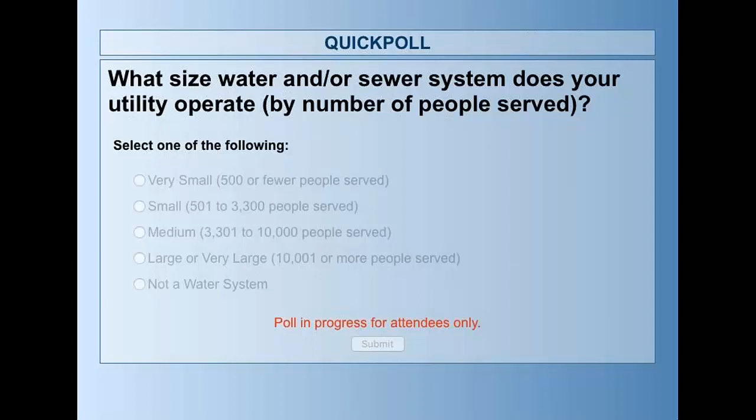All right, great. So it looks like we have quite a few people from small systems. That's great to see. 23% are serving 501 to 3,300 people. 17% are very small, less than 500 people served. A fair amount of medium and just a couple of very large systems. And then again, we're seeing that a couple of you are not from water systems, 25%.

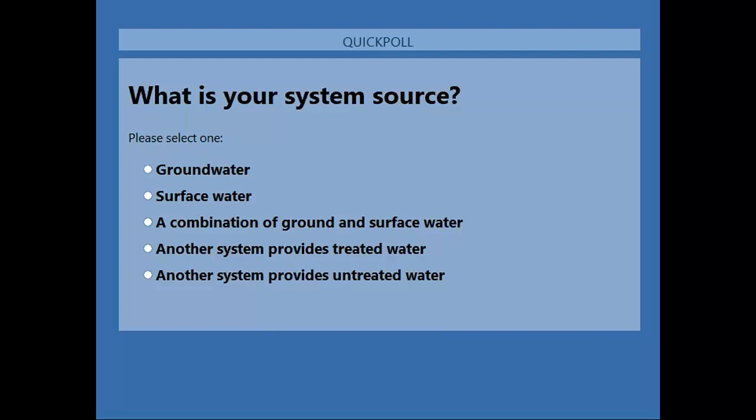Okay, it looks like we are still waiting for a few more people to vote here. All right, looks like we have just about everybody. So I'm going to close this poll and share the results. Wow, so overwhelmingly we have a lot of groundwater sources. Also 19% is a combination of ground and surface water, and then 14% is just surface water. And then in the minority, we have another system providing treated water and another system providing untreated water.

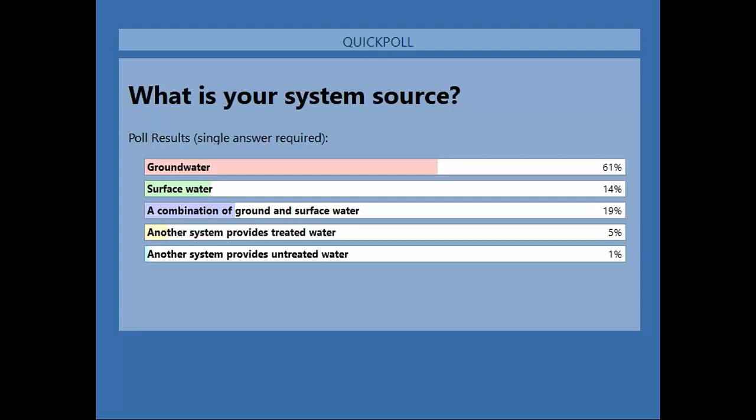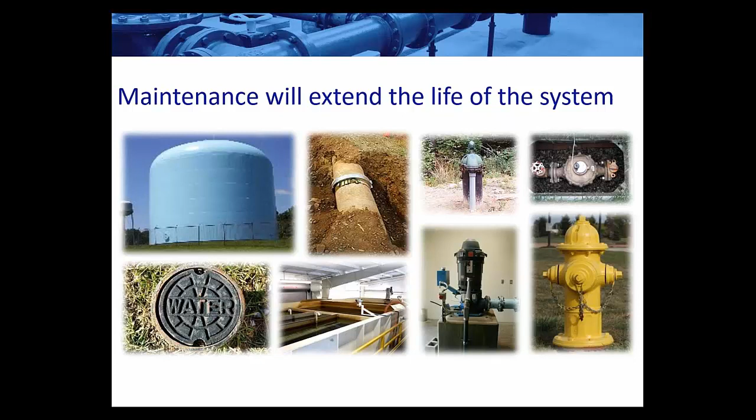So why is O&M valuable? Well, if an airplane was maintained the way that you maintain your water utility, would you fly in it? Typically when I ask this question, I get a pretty good chuckle from the crowd, and then a lot of head shaking. Nope, wouldn't fly on that plane. Well, why wouldn't you fly on a plane that was maintained the way you maintain your system?

Well, typically we know that we aren't doing the maintenance that we would like to be doing. Well, why not? Money. Money is limited. But isn't drinking water safety important? Of course it is. So what if we can show value to doing maintenance over time instead of cutting that maintenance budget and putting things off?

So this shows how an asset might perform over time. Typically the asset's going to perform at an acceptable level for a fair amount of time with the condition slowly changing, and then at some point that asset condition begins to change more rapidly. When you get to that point of reaching the minimum acceptable level of service, you have to make a decision about what to do, about to repair it, replace it, or rehabilitate it. If you don't, and you continue to let that asset run, it will ultimately run to failure. What if instead you had the chance to intervene at some point before the asset hits that minimum acceptable service level? Then you can change that curve and you can improve the condition of that asset again.

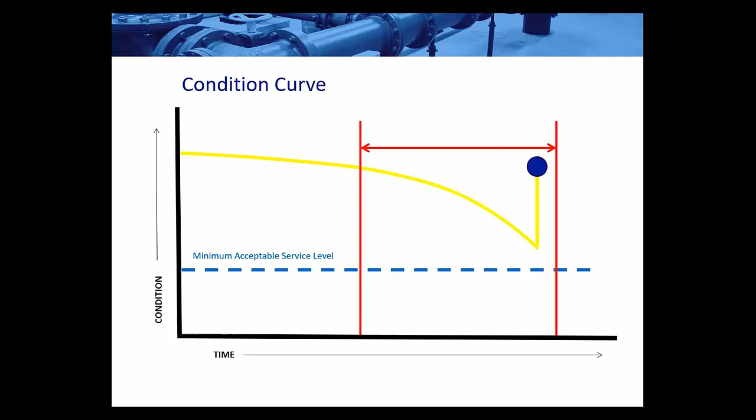This will extend the asset's useful life in a manner that is planned, and it potentially allows for further intervention down the line.

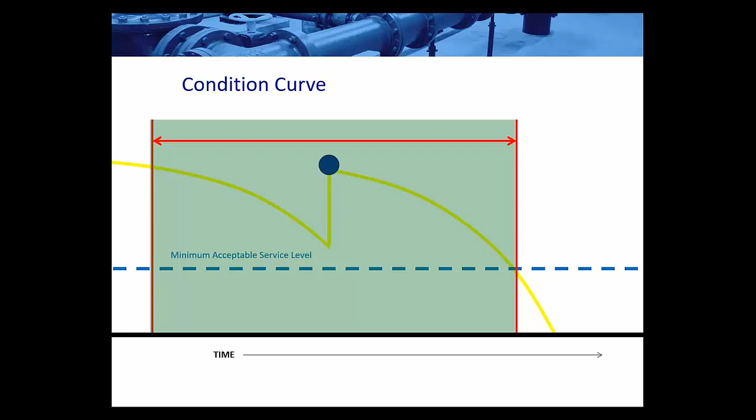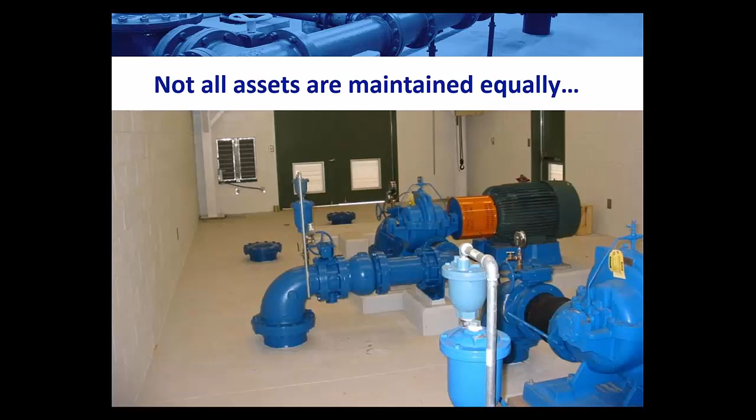You may not want to do this for every asset in your system. You may not want to do maintenance to everything. You may want to let some assets run to failure. But the assets that are in your system that are critical, that have a high dollar value, you definitely want to have planned maintenance and possibly planned rehabilitation for those assets to extend their life and to get the maximum value out of those assets.

So what we've been talking about are two basic modes of maintenance. First, we have the proactive, and then we have the reactive. And of course, we're often working in this reactive mode of fixing it only after it breaks. We tend to operate this way often and repair or replace only after the asset breaks.

So if we go back to that plane metaphor, airlines aren't allowed to operate this way, or we would see airplanes falling out of the sky. So when you think about it, water utilities really are the guardians of public health. They're what makes our modern civilization possible, what makes industry possible, what makes population growth possible, all of those things. Because we don't have to deal with the issues of waterborne diseases like we used to.

So it is really important to think about the role that your utility plays in your society, and if continuing to operate in this reactive mode really is the right option, or if indeed we should be doing this proactive, where we work in doing maintenance to keep those assets from breaking.

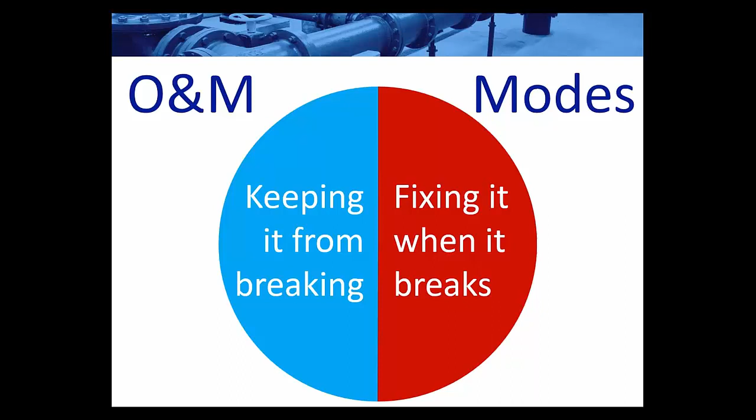So that's what we're really here to talk about today, is focusing on this proactive maintenance, because reactive maintenance is almost always more expensive than proactive work. It can be very inefficient. It can be very unplanned. It puts you behind that 8 ball. It can be more complex. It can require overtime. You might not have the spare parts on hand that you need. So getting the thing fixed in a timely fashion can be problematic.

So we want to be more proactive than reactive. So when we focus on this proactive side of things, there are 3 different types of typical proactive maintenance. We have routine maintenance, we have preventive maintenance, and we have predictive maintenance. And if you add all of those together, you're definitely going to get savings at your utility.

So why would you want to ensure that you're doing these things? Well, according to a case study by the Office of Energy Efficiency and Renewable Energy, practicing periodic component replacement in the form of preventive maintenance saves an estimated 12 to 18% over reactive maintenance.

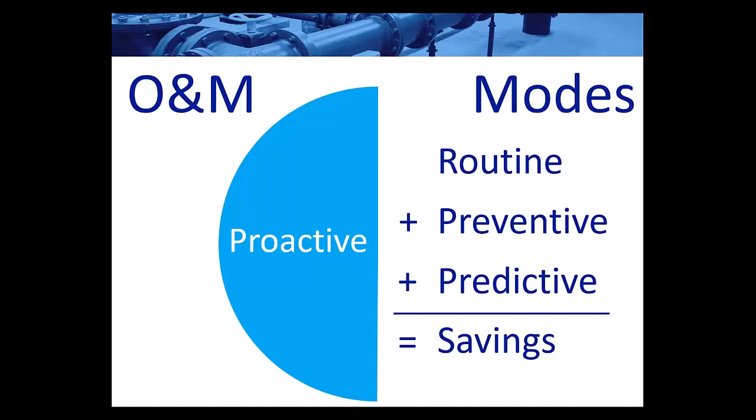That number could be fairly conservative for water utilities where a lot of our assets are buried, so getting to them to work on them can be more difficult than walking into a building and working on an asset. Today we're going to focus primarily on routine and preventative maintenance, with the tool we're demonstrating, and how they can help you with O&M planning and scheduling.

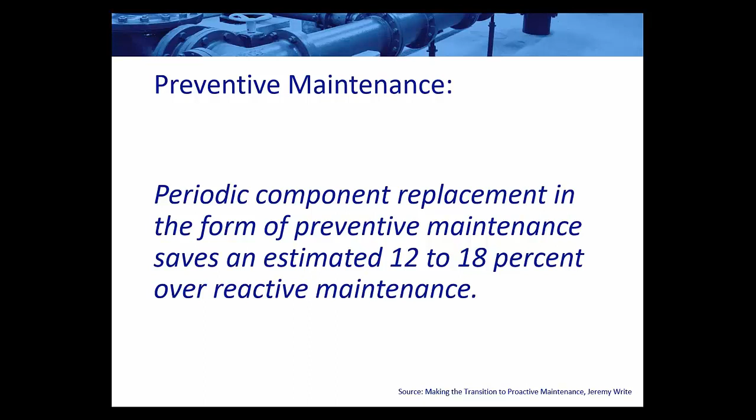When we look at preventative maintenance, it's not a new concept. It is standard practice across almost all industries, especially if you rely on machinery to create a product. It's definitely a core component of lean manufacturing. According to a case study by the Office of Energy Efficiency, there's 12 to 18% savings by doing the maintenance. So you want to make sure you're making this transition to preventative maintenance.

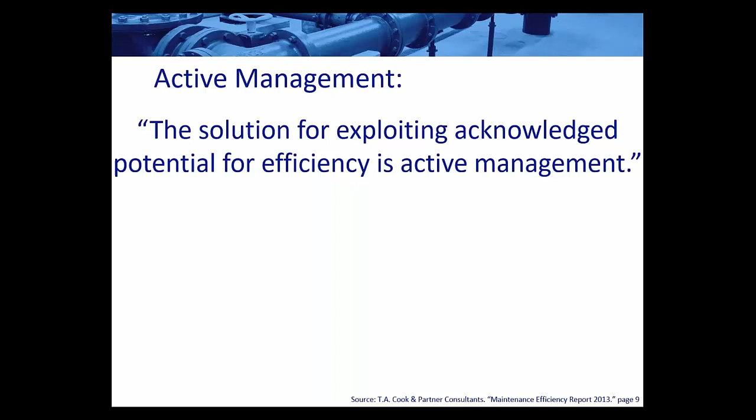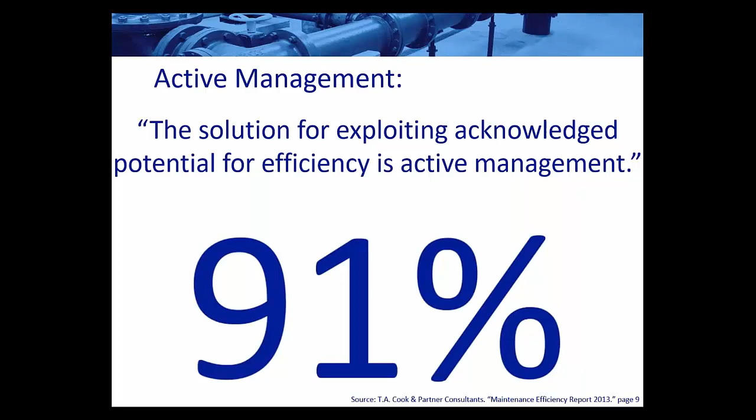Another study showed that whenever people were surveyed about maintenance and asked if it's important to be doing maintenance, overwhelmingly 91% of respondents agreed that active management is an important variable when it comes to efficient operation. So it's not that we don't know we should be doing maintenance, it's that we struggle with proving value. These statistics show that there is definitely cost savings in doing maintenance.

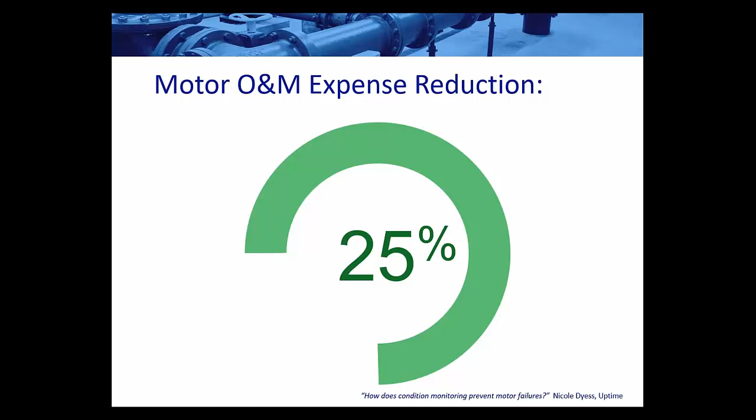And if you add that third type of maintenance, predictive maintenance, the savings can further increase. Condition monitoring can decrease your motor operations and maintenance expenses by up to 25%. So it's definitely a valuable effort to start with some preventative maintenance and work your way into some predictive maintenance.

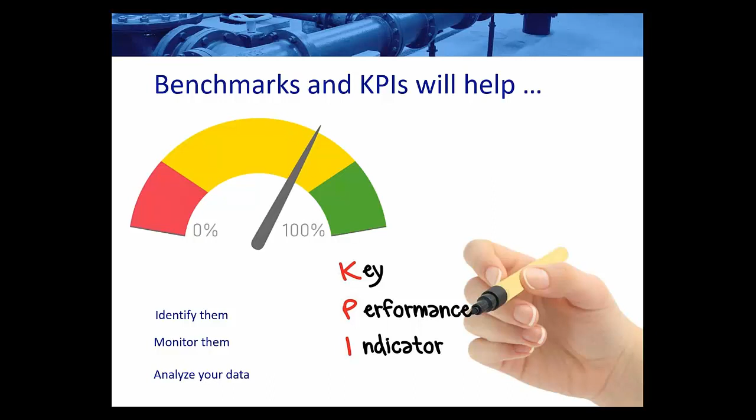We want to make sure we are looking at our benchmarks and key performance indicators, and that we remember, in asset management terminology, we're thinking about level of service. You want to be able to identify those key performance indicators, benchmark them, monitor them, and then analyze that data. But to be able to do any of that, you have to have one thing, and that one thing is data. You need data, and the best way to start getting that data is by implementing a preventive maintenance program so that you can start tracking information about your system.

So just a couple of thoughts: if you don't manage your assets, they will manage you. And for the majority of our utilities that we polled this morning, you're being managed by your assets. That's really a difficult work environment to be in day in and day out. You're constantly waiting for the next thing to break instead of planning your day in advance and knowing what you're working on.

Another quote that sums it up nicely is that even if you pride yourself on how quickly you can make repairs, and you're reactively repairing things that could have been dealt with through proactive maintenance, you're basically rewarding failure. So if you think about it — yeah, it doesn't take us long, we're really good at getting out there and getting it fixed — is that really acceptable? Because you're letting it break, you're letting something fail before you pay any attention to it. Just another way to think about how we go about our business.

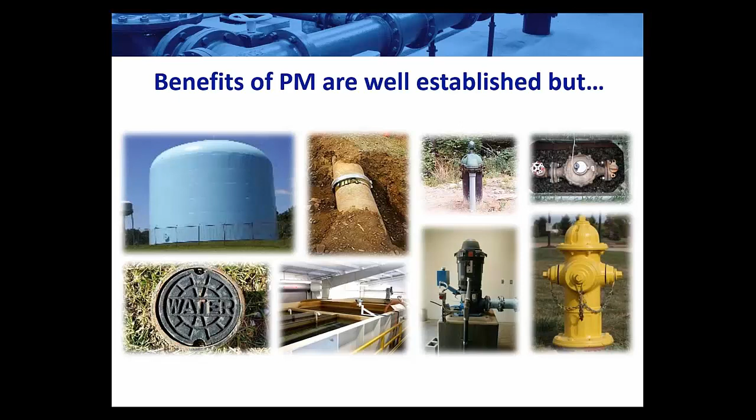So we know that maintenance is beneficial and cost effective, but this probably leads you to a couple more questions: what should I do, and when should I do it? These can be pretty difficult questions to answer if you don't already have an established plan, a good guidance document, or if the person who used to maintain the system is retiring or has already retired and all of that maintenance information left with him or her. So what we want to talk to you about today is a way to address those questions. James is going to show you a tool to help you get started. So if you'll bear with us for just a second, James is going to take over.

The good news is you do not have to remake the wheel if you're just getting started with this. Some of you may be familiar with the EPA's black box card file. This was essentially a low-tech recipe box list of daily, weekly, monthly, annual tasks, developed back in 2004. There are actually two versions — one is tribal system specific, but they're essentially the same. The idea was to lay out the typical tasks a small groundwater system would do and give them a place to record that information. The tool we're talking about today is sort of the next iteration of that card file, which is an electronic version of this.

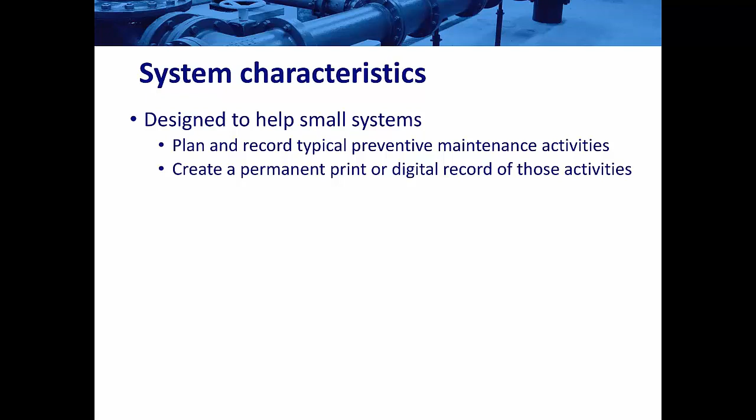This is designed to help small systems plan and record typical preventive maintenance activities and to create a permanent print or digital record of these. It looked like about half of the systems sitting in today don't have anything yet, so this is a good starting point.

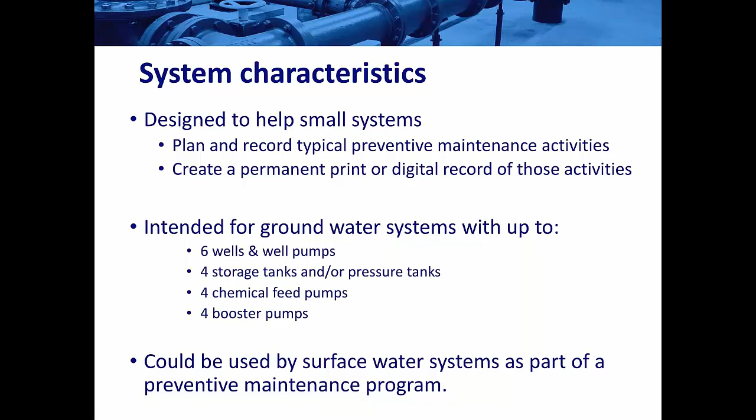The documents themselves are designed for small groundwater systems with up to 6 wells and well pumps, 4 storage tanks or pressure tanks, 4 chemical feed pumps, 4 booster pumps, and there are a few other criteria. But it could also be used by a surface water system as part of a preventive maintenance program.

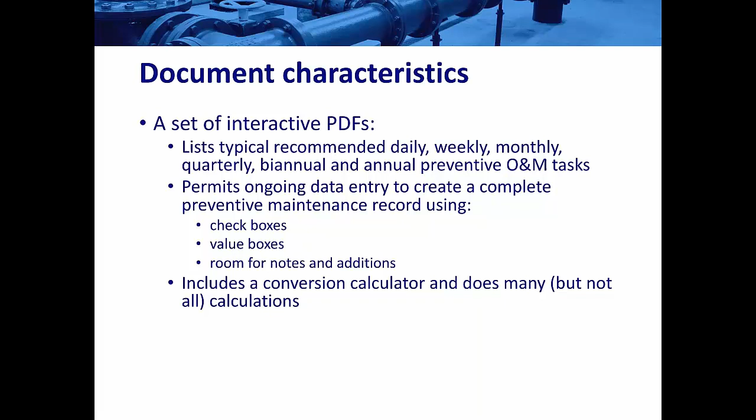The document characteristics: it's a set of interactive PDFs. They list the typical recommended daily, weekly, monthly, quarterly, biannual, and annual preventative O&M tasks, and they permit ongoing data entry. They use a combination of checkboxes where you can check off that a task has been done and initial it, value boxes, and rooms for notes and additions of tasks not listed. It includes a simple conversion calculator, and it does some but not all of the calculations, which you'll see as we demonstrate this further on.

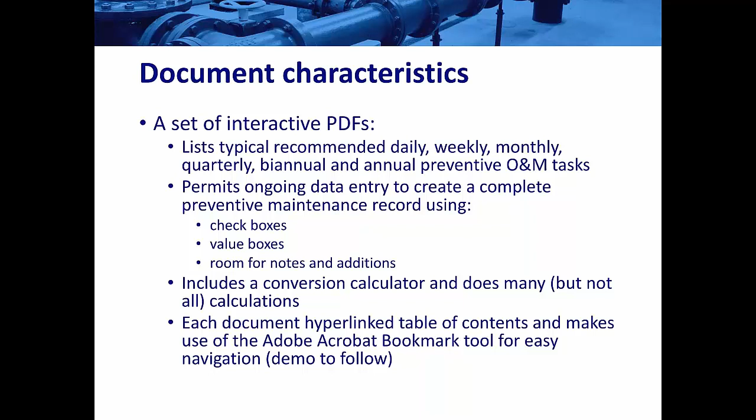Each of the documents has a hyperlinked table of contents and makes extensive use of Adobe Acrobat's bookmark tool, which I'll be demonstrating shortly. That makes it really easy to navigate in and around the document if you are using it in its electronic format.

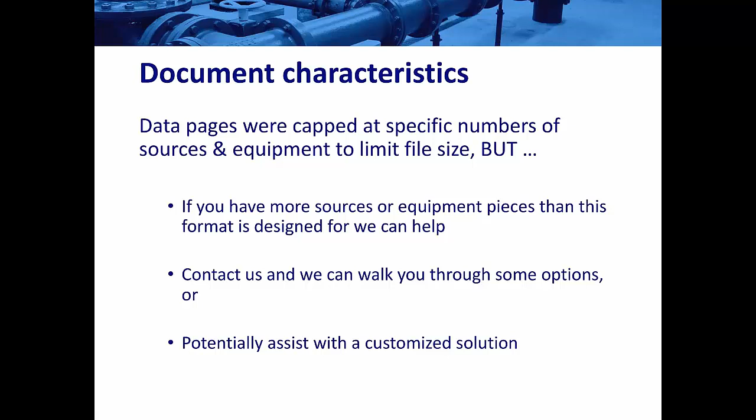Now, I gave you some system characteristics earlier. The pages were capped at specific numbers to limit the file size, but if you have more sources or equipment pieces than this format is designed for, we can potentially help. You'll see our contact information at the end. We can walk you through some options and potentially assist you with creating a customized solution for your system.

Basic software requirements: it's a PDF. All you need is the free Adobe Acrobat Reader, which you can download from a lot of different places—just search for Acrobat Reader. Do not use another PDF reading system. I'm, for example, sitting on a Mac. It has Apple Preview—if I use that, I can open up the pages and look at them, but the formatting is off, and some of the formulas will not work.

So it's designed for Acrobat. Acrobat is free, and if you want to use this, we highly recommend you use Acrobat for that. Now, it is an interactive document, and it is editable. But to do that, you would need the full version of Adobe Acrobat software, and I'd suggest you not try that unless you have a lot of experience with editing complicated PDF files. If you do have that experience, feel free to go for it, or contact us and we can give you some help.

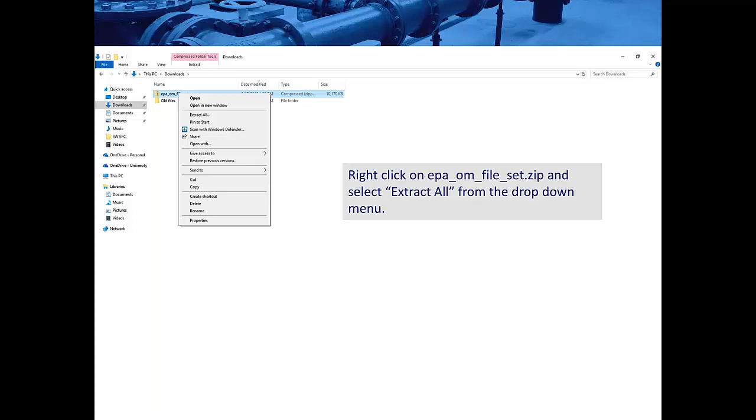You will have to unpack that, and Windows 10 has a standard unpacking software built into it. There are other free versions of zip software you can use. So if you go there, click on your file set, right click and hit extract all, which is right there.

It will pop out an extracted version of this file set, also called EPA OM file set, and nested in that is the actual file set folder, which is the exact same name, just in capital letters. If you look in there, you'll see essentially a duplicate of what we saw on the individual page download page.

It's got the individual monthly files. It's got a set of guidebooks, introductions, and some ongoing logs, and a README file, which contains a very short synopsis of what we're covering today and has some of the basics in there. I suggest you take a look at it before you start working with the other files.

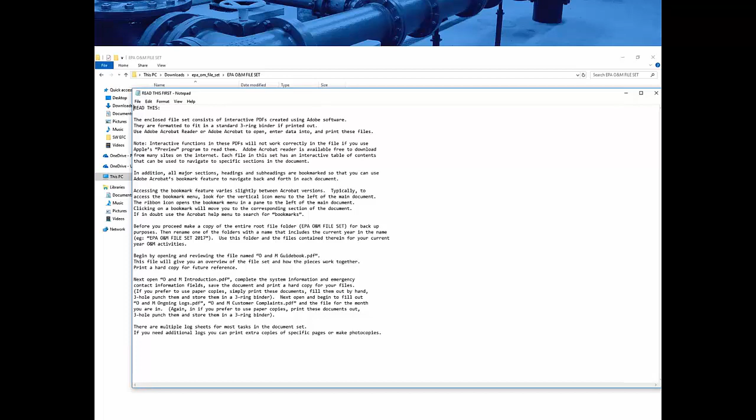As far as actually working with the file set, I highly recommend you, first thing you do, make a copy of it and append the year to it. That way you will have a working copy that you can use as a basis for upcoming years, and you have a file set that you can work on now. You can see I've done that here. I just appended 2018 to the end of it.

I kind of went a little overboard in my sample here and actually appended the year to the individual files. You might want to do that if you think you may be passing files around between people, particularly if you use this for a couple of years. You will want to be able to distinguish November 2017 from 2018 or 19.

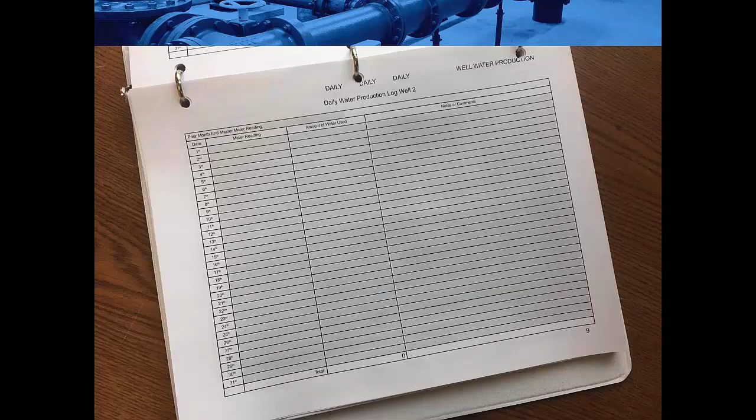There are also a set of ongoing logs here. Basically, you can open these up. And again, as I said, you don't actually have to use them in their digital format. You can use them in their analog format as well. It works just as well.

These are formatted for 8.5 by 11 pages, but if you want to get the full benefit out of this, you really need to use the Adobe version of it. I'm sure most of you are probably familiar with Adobe, but I want to point out a couple of things just in case you don't work with it very frequently.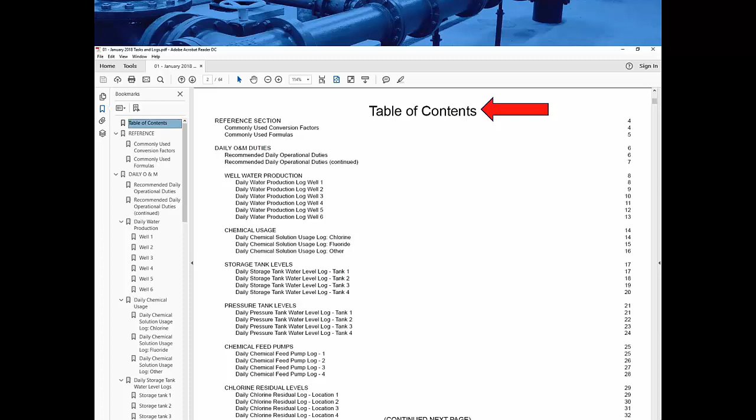And again, you can use this little button here to close the menu down if you don't need it right away, or you can use this X up here to close the entire thing. So they mirror each other.

So we're going to do a quick little document demo here. I'm just going to show you some of these, so bear with me while I switch screens. I've got some of these files up, and I'm just going to give you a few highlights.

Okay, Acrobat Reader. So the first file to look at is the introduction. This is a live version, so you'll see me navigating around here. It's basically got a place to put system information, contact information, and some references.

Important pieces to know: system information. This is where you would fill in your water system name, and so on. Go ahead and save often.

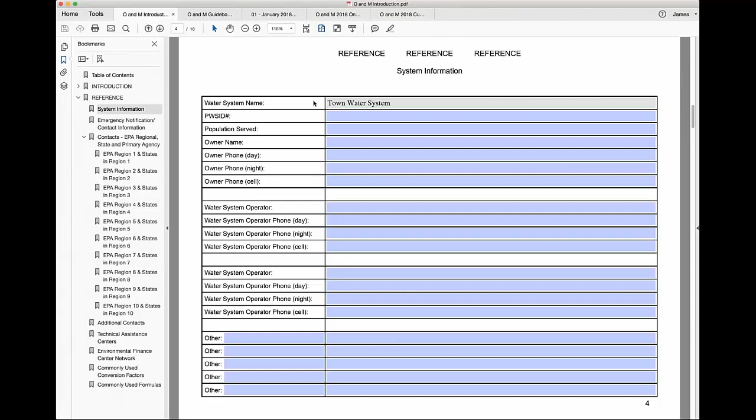The next tab is also very important: emergency contact information. I've put some information in here, but you want to have all these numbers listed ahead of time so that you're not looking around for the fire department or the hospital after an incident has taken place.

This also contains a lot of useful contact information. There's EPA, regional, state, and primary agency contact information. There's information for the various technical assistance centers around the country and all of the members of the EFC network.

I've also included the simple calculator, so you can see this is essentially an interactive calculator. If you type information into the blue box, you'll get the corresponding conversion in the right-hand column. It also has a list of commonly used formulas at the end.

The next document I want to show you is the guidebook. This is basically the book that lists all of the tasks that are in the various monthly components and tells you why you're doing them. It also gives some basic information on how the files can be used, and has guidance notes.

These are very useful, and then it has specific guidance notes for the specific tasks. This is obviously something you would only have to make one copy of or print out once, but it's a useful thing to have to refer back to if you're looking at the monthly file tasks and you're not entirely sure what to do or why you're doing one of the specific tasks.

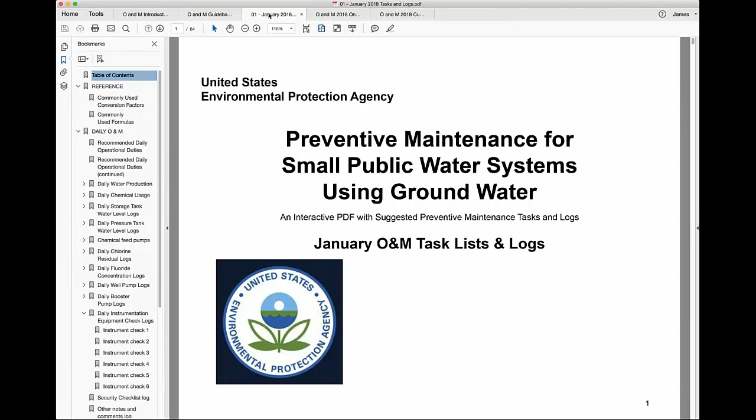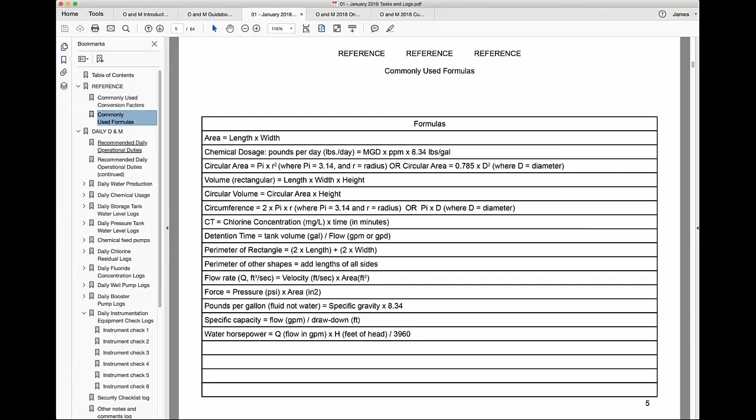Again, we've got a bookmarked table of contents. We've added those conversion factors and commonly used formulas to the beginning of this. This is really set up to list daily activities, and then it moves on to weekly and monthly activities. So the first thing here is essentially a list of recommended duties.

This is essentially a checklist you can use to just verify that you have all of the tasks that you want to have accomplished listed. So in this example, I've unchecked the fluoride concentration because maybe fluoride isn't an issue with the particular system that I'm looking at.

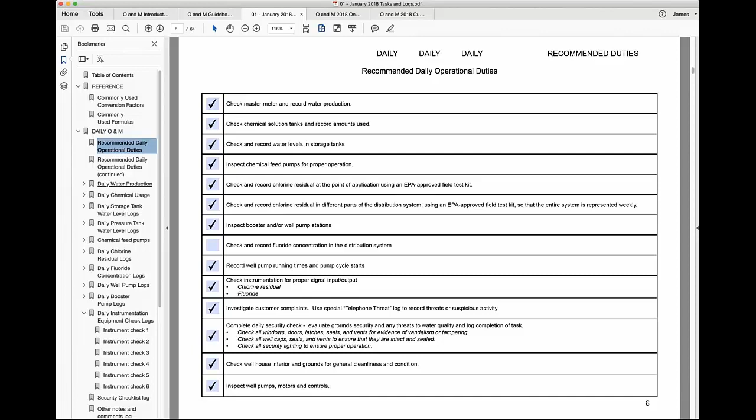We've got individual logs for a lot of different tasks. So this, for example, is one of the well logs. There are actually 6 of them. If you only have 1 or 2 wells, you obviously don't have to use the other ones, but you can use these links here to navigate back and forth between the different wells.

What this will do and what it won't do: I've got a prior monthly meter reading listed up there, and individual meter readings listed here. It will not calculate the amount of water used on a daily basis, but what it does do is keep track of a running total down at the bottom.

The reason we did it this way is that a lot of systems just don't actually log their production on a daily basis, and it made the math and programming a little more difficult than it needed to be. So as a compromise, we let you do the sort of daily math, and it will keep track of the running math. There's also a place here for you to put notes if you want to.

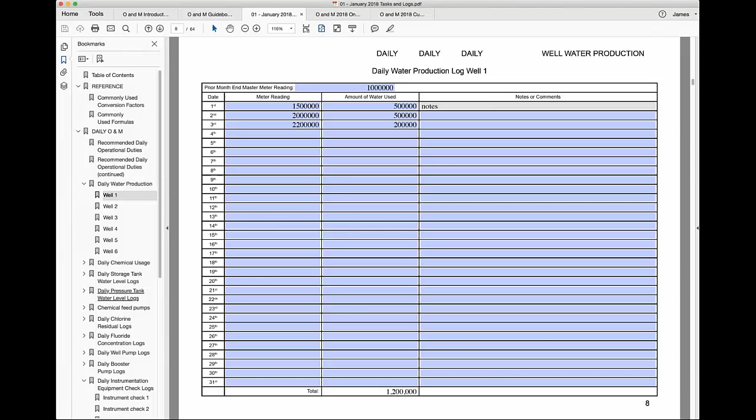So I'm going to move on, and skip some of these and show you some others. For example, daily storage tank levels: you've got a place to put what your normal operating high and low levels are, places to record system pressure or water level, and actions taken that are necessary or not.

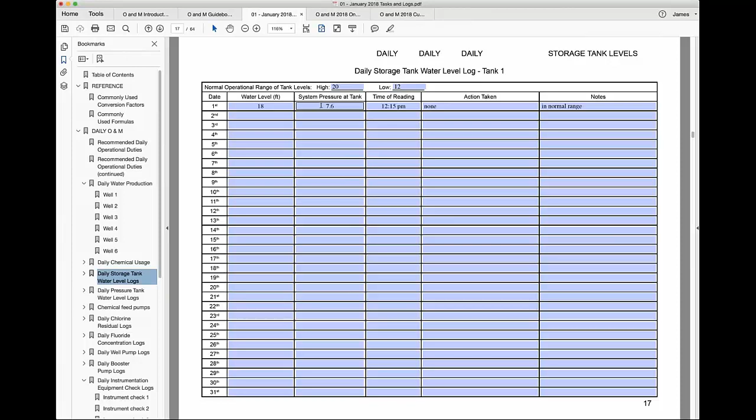It's some basic simple math. Over here you can put in what your expected dosage is, and use that as a way of comparing things.

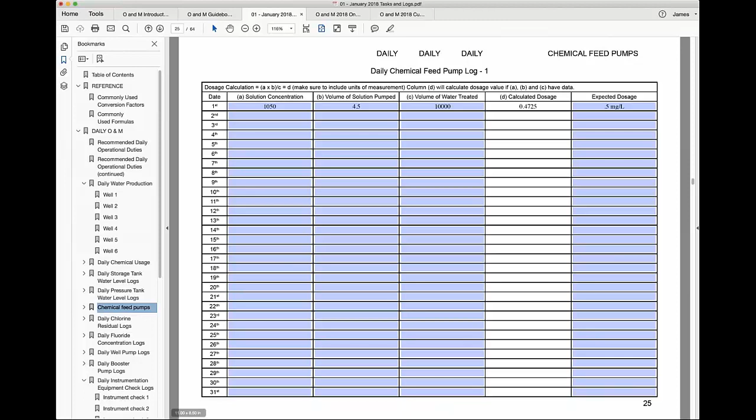There's also room for you to add additional tasks, if there are additional things that you and your particular system would like to have checked on a weekly basis. And so you can add those in, save the document, and they'll be there for you for future use.

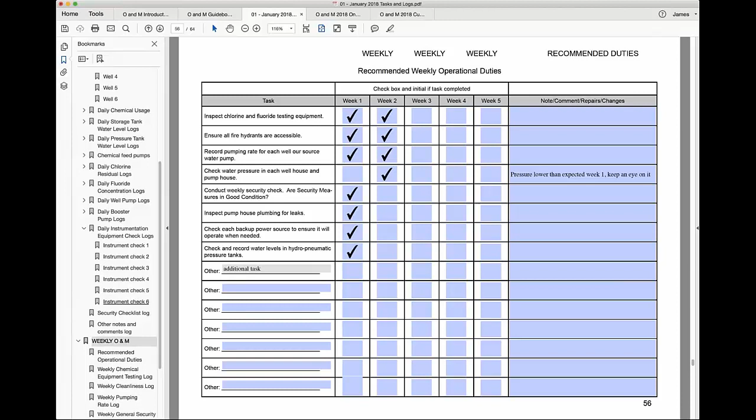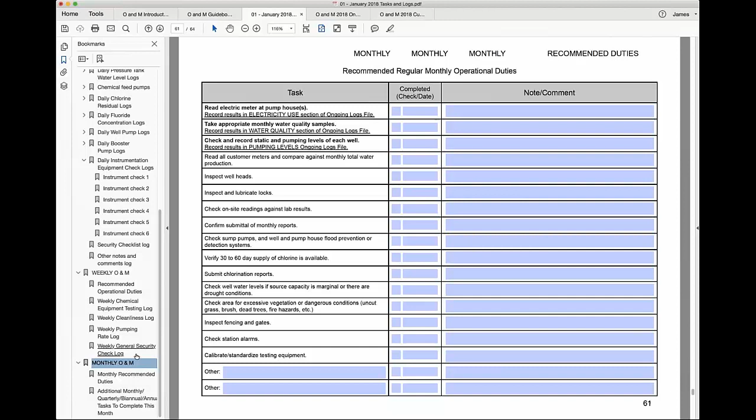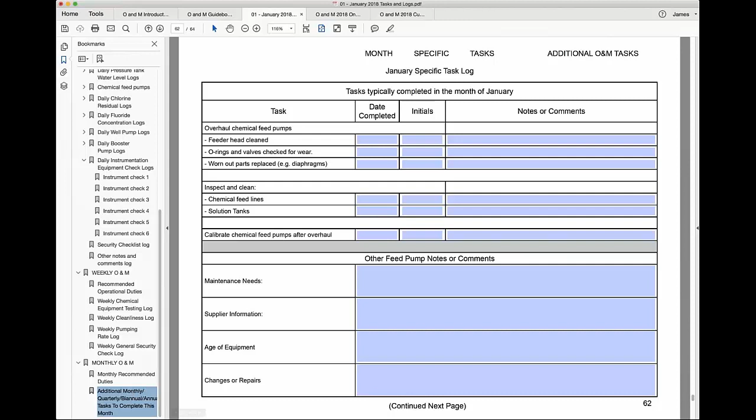Each of the monthly files is broken up to have sort of the typical recommended monthly duties and then additional duties that are typically done in that month. So for example, the January monthly specific tasks has overhauling your chemical feed pumps listed in it as an extra task, inspecting storage tanks for sanitary deficiencies, making sure fire hydrants are accessible. And obviously we've left a lot of space here for you to move additional tasks around.

Different tasks may occur at different times depending on where you are in the country and what your weather is like. But basically the idea here is that all of those monthly, quarterly, biannual, and annual tasks have been folded into this monthly O&M section so that you do them in the appropriate month, and many of them have additional reminders in ongoing months. So for example, getting your system ready for winter. The first notice, I believe, shows up in October or September, and then in following months there's an additional reminder to verify that you actually did those tasks. So that's sort of the basic layout and the format of the monthly files.

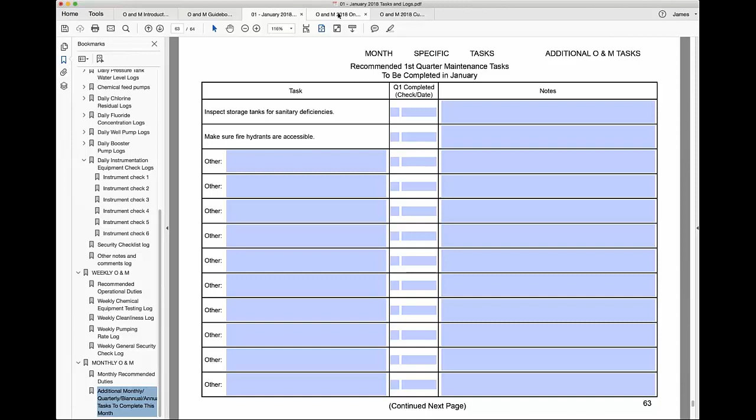Now I'm going to move on to the ongoing logs, and as Don was talking about, sort of having data to do analysis, these will help you. This has your water quality, your electricity use, well pumping levels, repair logs, valve exercising, and customer service and training logs all kind of folded into one location. So for water quality sampling, it's very simple. It's just, did you take your samples? Put some notes in the end. We've provided space for 6 different sampling locations.

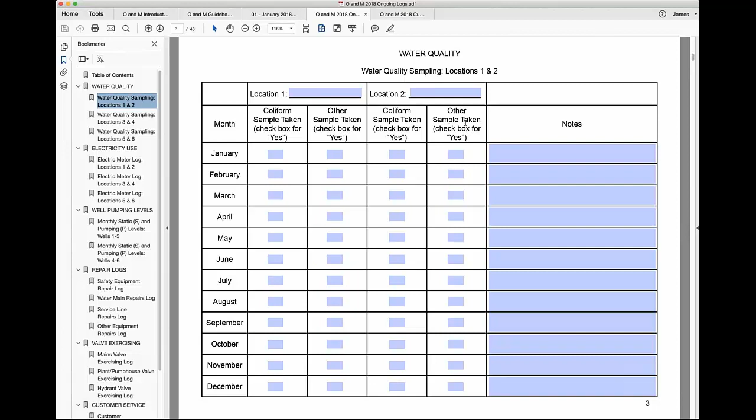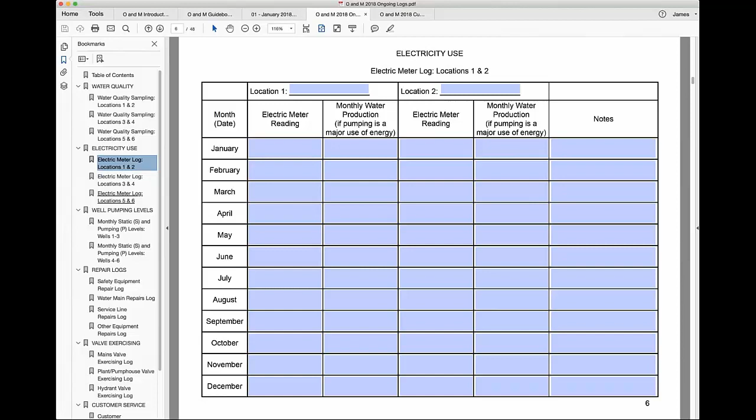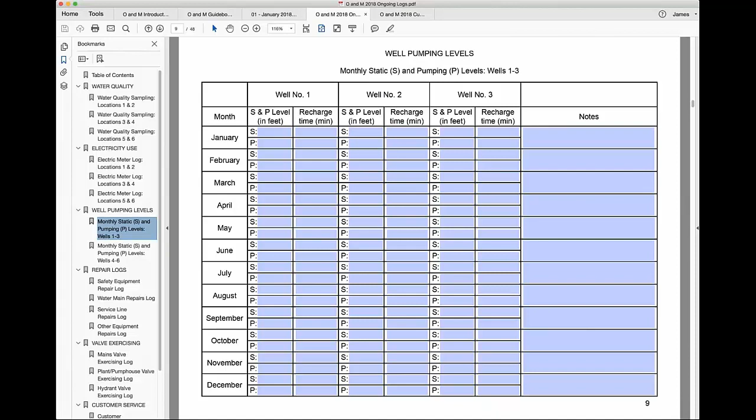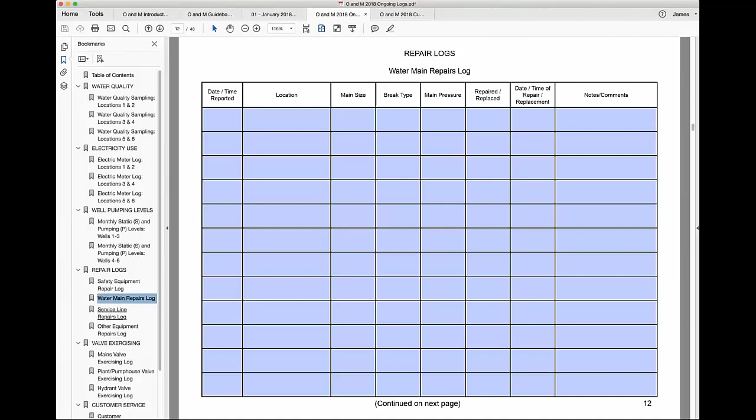Basic repair logs. Safety equipment should always be in perfect working order. The best way to verify that is to check it frequently and log your repairs. That way, if there's a chlorine leak and somebody's got to take the SCBA in there, you'll know that it's functioning. We've also put in place logs for water main repairs and service line repairs, and other types of equipment repairs. I can't emphasize enough how important it is to log water main and service line repairs.

One of the harder things for a water system to do is to get a good idea of the condition of its pipes, because they're underground and we often can't see them. Past performance is one of the best indicators of future performance, particularly when it comes to pipe. If you log this kind of information and, more importantly, take this information and visualize it, i.e. put it on a map, and that could be something as simple as push pins on a wall, you will start to notice patterns in your breaks, which will help you effectively maintain your system and build capital improvement plans and do that sort of thing.

Valve exercising is also a place I think that a lot of systems fall down on. It's one of those out of sight, out of mind things. You don't really need the valve to work until you have a break and you need to isolate a part of the system. And I've seen many, many systems that once they get to that position, go to try and turn a valve and it won't turn, and then they have to spend a bunch of time hunting, looking for the next valve to shut off that part of the system.

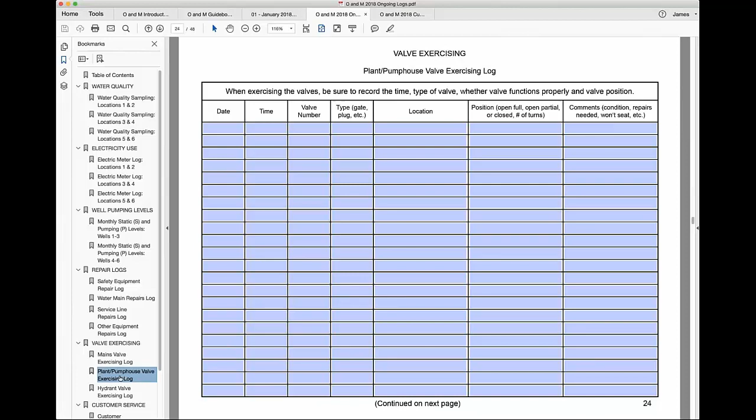We have put in logs here for mains exercising and for plant pump house valve exercising and for hydrant valve exercising, and scheduling for these is built into the monthly files. The idea is that for a small system, over the course of a year all of the valves would get exercised. You could obviously extend that framework to a multi-year period if you've got a larger system, but it's an important thing to do, and the only way to figure out whether they work is to actually exercise them, and obviously you want to log that and never start a valve exercising program on a Friday because there will be breaks.

And then finally, we've got a customer service log here. Dawn mentioned level of service at the very beginning. Knowing what your customers want, how you're reacting and responding to them, and being able to document that kind of information is very important. One of the best ways to do that is to talk to your customers. Your customers tend to call you when there are problems. You should note that. A lot of systems do a very, very good job of taking care of problems on the fly, but they do not do a very good job of documenting what they've done.

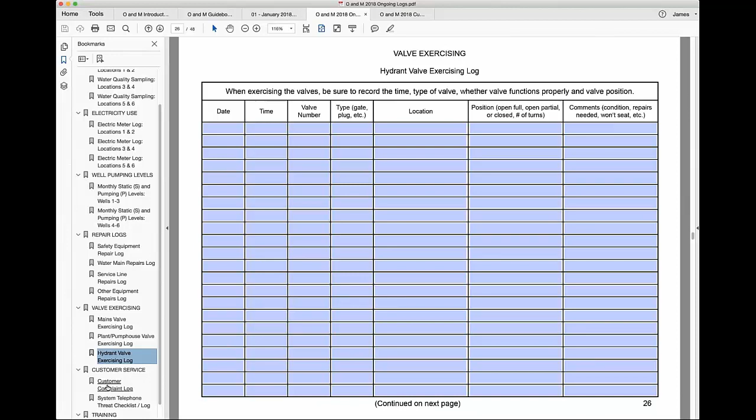And when you have a lot of customer service complaints about a particular issue, if you've documented both the fact that those complaints came in and how you dealt with them, or perhaps didn't because you didn't have the appropriate equipment or funding, having a log like this is very, very useful when you're going to your board members or to your ratepayers if you need to increase the rates for some reason.

And this is very, very simple. This is based off an Excel spreadsheet. It was essentially just a time reported, the type of issue, who it is, what kind of action you took, and importantly, when you resolved the issue. Those time lags can be very, very important, because if you've got a level of service that says we're going to repair all reported leaks within 24 hours, you want to be able to document whether you've actually done that or not, because if you have, that's something that you can brag about to your customers.

And then second to last, we've got a telephone threat list. Hopefully you will never have to use this, but occasionally people call and make threats to systems, and obviously in a situation like that, you want to have as much information about the call as you possibly can so that police or the appropriate authorities can potentially identify who it's from. An easy way to do that is to have a simple checklist like this, where whoever's getting the call, while they're listening to the person ranting and raving, can sort of check down the appropriate criteria about the caller's voice. In these days of caller ID, you might even actually be able to put their phone number down.

Last but not least is an employee training log. This is an industry that requires ongoing training. You want to be able to budget for it, and you want to make sure that your folks are doing their training on a scheduled basis, so you don't sort of run to the end of a time period and realize one of your operators has to take 2 days off to go for a training because they need their hours. This is a simple way of keeping track of whether that's been done.

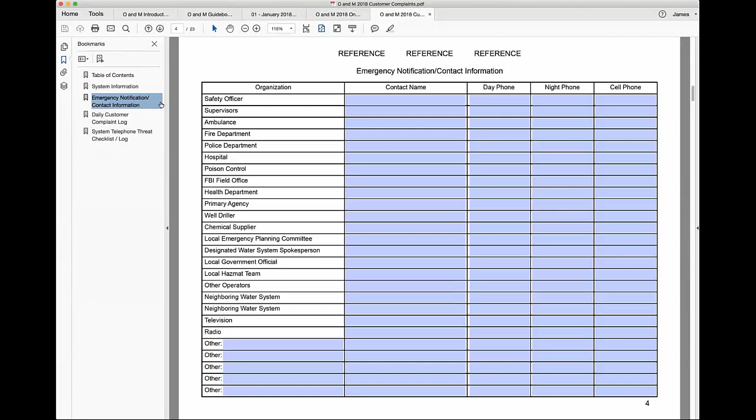The last document I'm going to show you here real quickly is the standalone customer complaint log. Sometimes the customer complaints and security threats come straight into an operator. Sometimes these happen when you're out walking down the street talking to people or doing some work on the system, but quite often calls like this come into the city's main desk or the utility's main desk. So we've essentially created a duplicate log that you could give to a front-end receptionist, or perhaps your billing department, or other people that are sort of customer facing, so that they would be able to take down this information. And it's basically got a duplicate page for the emergency information and your basic customer complaint and telephone threat checklist logs.

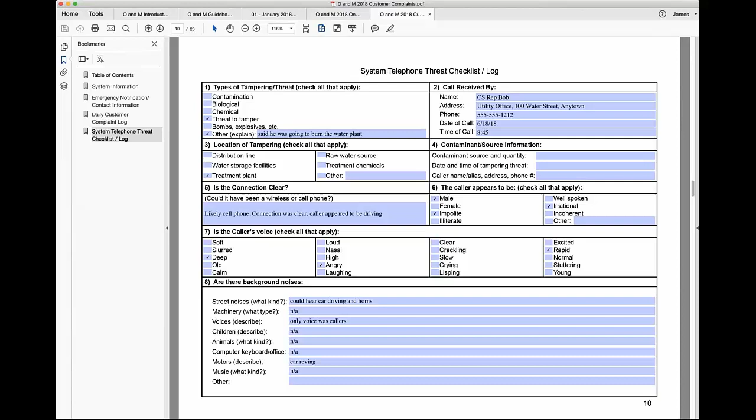So with that, that's sort of a brief overview of the document, and I realize that's very, very fast, but the guidebook is a very, very useful resource. It explains why all of the pieces are there and what they do. Now let me get back to my PowerPoint screen here and move forward.

Alrighty. Whoops, technical difficulties, 1 second. My PowerPoint just crashed on me. Dawn, would you mind picking up? Hold on. Never mind. Sorry about this, folks.

So we're going to go back to a couple of poll questions. Sorry about that. To sort of wrap things up, and then we will open up the floor for questions. Sorry that went a little bit longer than I expected, but we do have a few more minutes. Yeah, I can launch our poll here. I'm going to go ahead and launch this first poll.

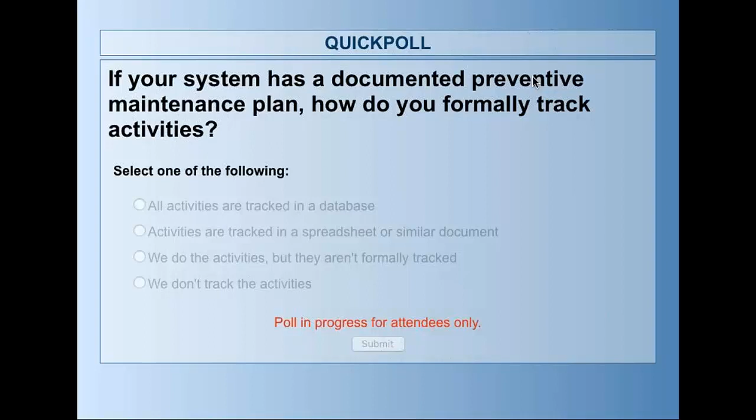If your system has a documented preventive maintenance plan, how do you formally track activities? Go ahead and select the best response here for your system. All activities are tracked in a database. Activities are tracked in a spreadsheet or similar document. You do the activities, but they aren't formally tracked. Or you don't track the activities. Looks like we're still waiting for a few more people to respond here. Okay, I'm going to go ahead and close this poll and share the results with you.

And great, looks like, wow, a lot of folks are tracking their activities in a document or a spreadsheet, 43%. 9% are doing so, but in a database. 30% are doing those activities, but not formally tracking them. And 17% are not tracking the activities.